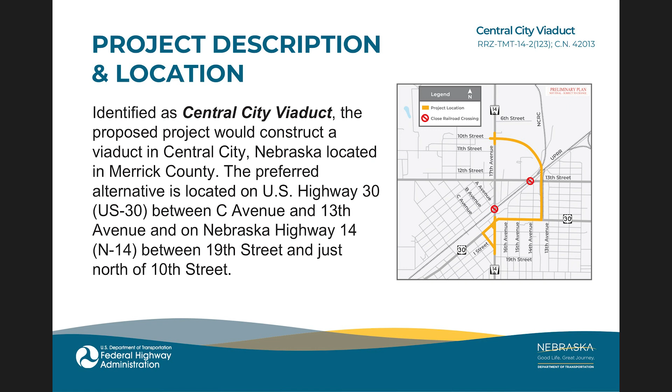Thank you, Commissioner Kindig. Hello, I'm Eric Klein. I'm NDOT's District 4 Construction Engineer. Identified as the Central City Viaduct, the proposed project would construct a viaduct in Central City, Nebraska, located in Merrick County. The preferred alternative is located on US Highway 30 between C Avenue and 13th Avenue, and on Nebraska Highway 14 between 19th Street and just north of 10th Street. The existing US 30 and Highway 14 intersections downtown would be realigned to the west, approximately B Avenue.

US 30 would be reconstructed as a 3-lane curbed urban roadway with 12-foot wide lanes, sidewalks, and parking between C Avenue and B Avenue, and between 16th Avenue and 13th Avenue. Between B Avenue and 16th Avenue, US 30 would be a 2-lane divided curbed urban roadway with a 4-foot wide raised median and 20-foot wide lanes with sidewalks. C Avenue and existing Highway 14 from US 30 to I Street would be designated as one-way pairs for northbound and southbound Highway 14. Highway 14 would be reconstructed as a curbed urban roadway with 12-foot wide lanes, sidewalks, and parking.

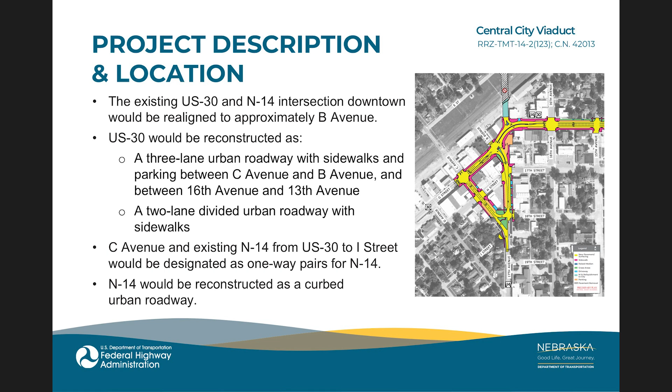A portion of Highway 14 would be constructed on a new alignment starting from US 30 halfway between 14th and 13th Avenues, proceeding north, crossing over the Union Pacific Railroad, and then proceeding west to connect back to existing Highway 14 at 10th Street. These improvements would consist of constructing a 580-foot-long viaduct over the Union Pacific Railroad. The roadway would be a 2-lane curbed urban roadway with 12-foot wide lanes and 6-foot wide shoulders and a sidewalk on the east side of the roadway.

Two existing at-grade Union Pacific Railroad crossings would be closed as part of this project, one at existing Highway 14 and one at 13th Street. The north intersection that ties into the existing Highway 14 would be a roundabout. The south intersection with US 30 would be a T intersection. As per discussions with Central City, existing Highway 14 from the railroad to just south of 10th Street would be repaired and relinquished to the city.

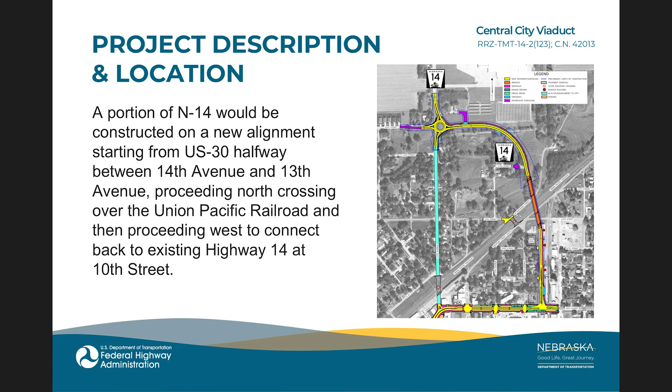The purpose of this project is to eliminate conflicts between trains and vehicles at the existing Highway 14 at-grade Union Pacific Railroad crossing, reduce traffic congestion and associated delays at the Highway 14 crossing of the Union Pacific Railroad tracks and at the intersection of US 30, and to improve operations and reduce crash costs associated with the Highway 14 and US 30 intersection.

NDOT identifies the need for the railroad grade separation structures by considering the potential number of conflicts between road users and trains, traffic delays, and crash costs. The highway rail crossing of Highway 14 and the Union Pacific Railroad mainline meets NDOT's thresholds for considering a grade separation. NDOT has also determined a need to address operational challenges at the intersection of Highway 14 and US 30.

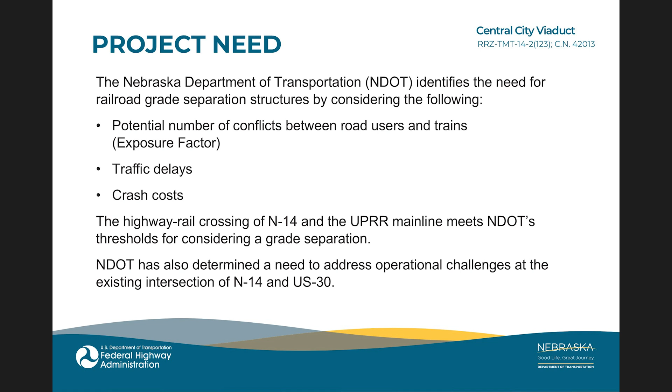In summary, the improvements on this project would reconfigure the downtown intersection of US 30 and Highway 14 to a pair of one-way roadways, reconstruct US 30 from C Avenue to 13th Avenue, construct Highway 14 on a new alignment with a viaduct over the Union Pacific Railroad, close the Union Pacific Railroad crossings at existing Highway 14 and 13th Street, construct a roundabout at the intersection of relocated Highway 14 and 10th Street, and repair the existing Highway 14 between US 30 and 10th Street prior to relinquishment to the city.

Additional improvements would include new paving, culvert and storm sewer work, guardrail, roadway retaining wall, fencing, sidewalks, pavement striping, lighting, pedestrian accommodations, and traffic signals.

Now I would like to talk about the history of this project. In 1996, Central City requested that NDOT perform a study to determine if building a viaduct to carry vehicular and pedestrian traffic over the Union Pacific Railroad mainline tracks would be justified. In 2007, a NEPA review was approved by FHWA for the realignment of Highway 14 along the old Burlington Northern Santa Fe grade bypassing downtown Central City on the east, and the construction of a viaduct over the Union Pacific Railroad tracks. In 2011, the project was reprogrammed more simply as a viaduct project over the Union Pacific Railroad and no longer included the bypass around downtown.

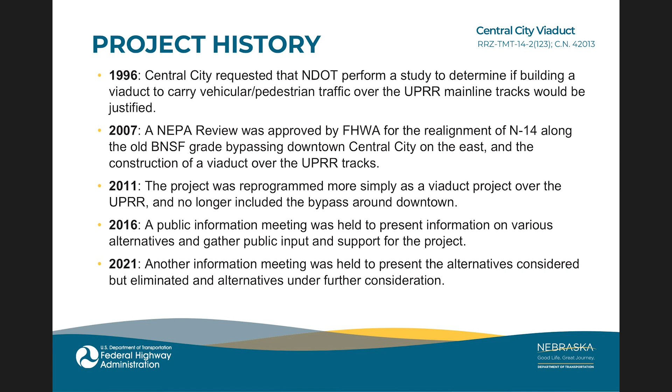Thank you, Eric. Hello, my name is Dawn Knott, and I'm a design engineer and the project manager for the project. Several viaduct alternatives were considered for the project, but were eliminated. The alternative referred to as the on-alignment alternative would have involved reconstructing Highway 14 on its existing alignment and constructing a viaduct over the Union Pacific Railroad. The on-alignment alternative was deemed unfavorable due to its adverse impacts on the central business district, removal of the direct connection of Highway 14 and US 30, increased costs, and impacts to numerous historical buildings. As a result, the on-alignment alternative was removed from further consideration.

The alternative referred to as the East Close alternative would have involved constructing a new roadway along the Nebraska Central Railroad Company rail corridor between 13th Avenue and 14th Avenue, constructing a viaduct over the Union Pacific Railroad, and tying back to existing Highway 14 at 13th Street. The East Close alternative was deemed unfavorable due to steep grades, a required tilting of the roadway on the bridge curve, severed access to 16th Avenue, and impacts to the Central City electrical substation.

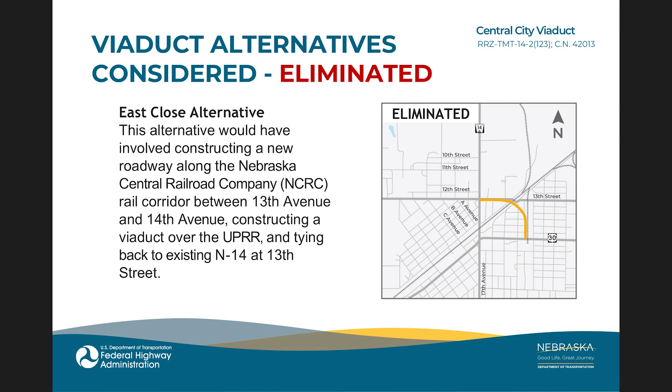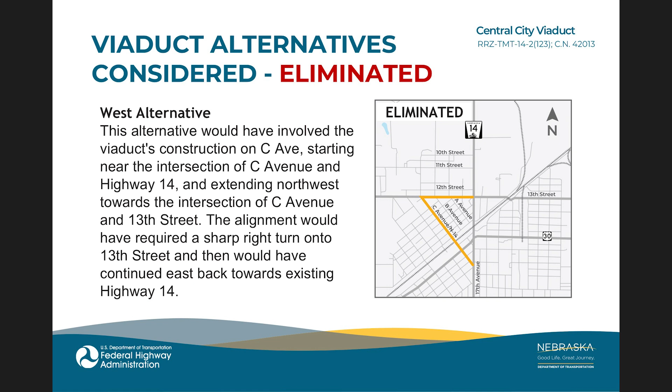The alternative referred to as the West alternative would have involved constructing the viaduct over the Union Pacific Railroad on C Avenue, starting near the intersection of C Avenue and existing Highway 14, and extending northwest towards the intersection of C Avenue and 13th Street. The alignment would have required a sharp right turn onto 13th Street and then would have continued east back towards the existing Highway 14. The West alternative was removed from further consideration due to issues with the existing roadway system, increased impacts on residences and businesses, and disconnection of Highway 14 and US 30. This alternative also received an unfavorable response from the public when presented in 2016.

In addition, several intersection alternatives for the existing US 30 and Highway 14 intersection were considered for the project but were eliminated. 3 roundabout options were considered: a 130-foot diameter roundabout and 2 160-foot diameter roundabouts. Each roundabout had varying degrees of performance, impacts on existing buildings, elimination of parking stalls, and changes to the road network. In addition, the 130-foot diameter roundabout was less favorable for truck movements, and the larger roundabout between B Avenue and C Avenue would have eliminated an entire city block of businesses. For these reasons, all 3 of these roundabout alternatives were eliminated.

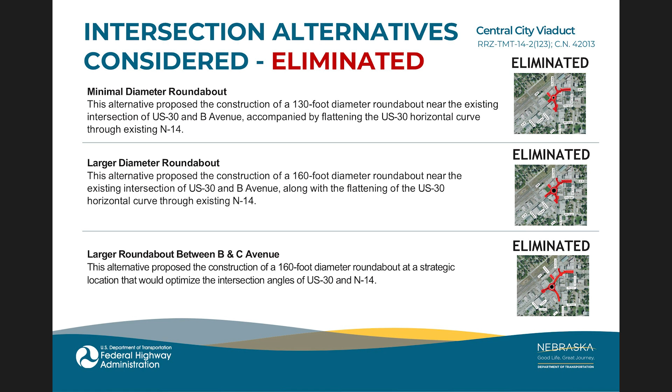2 standard T intersection alternatives were considered that would have relocated Highway 14 to a new alignment, either using B Avenue or C Avenue. Both of these alternatives would have resulted in greater impacts to the downtown businesses, elimination of more parking stalls, and less than desirable turning movements, and both were eliminated.

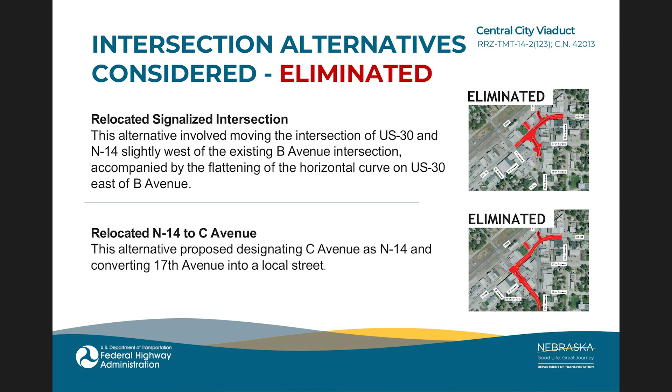The alternative, referred to as the East alternative, and the one-way pairs intersection alternative have emerged as the preferred alternatives for the project, presenting advantages compared to the other alternatives. These alternatives involve the construction of a new roadway along the Nebraska Central Railroad Company rail corridor between 13th Avenue and 14th Avenue, the installation of a viaduct over the Union Pacific Railroad, and a new roadway north of the Union Pacific Railroad that would connect back to existing Highway 14 at 10th Street.

The downtown intersection of Highway 14 and US 30 would be reconstructed as a set of one-way streets. Between US 30 and I Street, Highway 14 would be one-way northbound, while C Avenue would be one-way southbound. This alternative best meets the purpose and need, minimizes impacts to businesses, and maintains regional and local road connections.

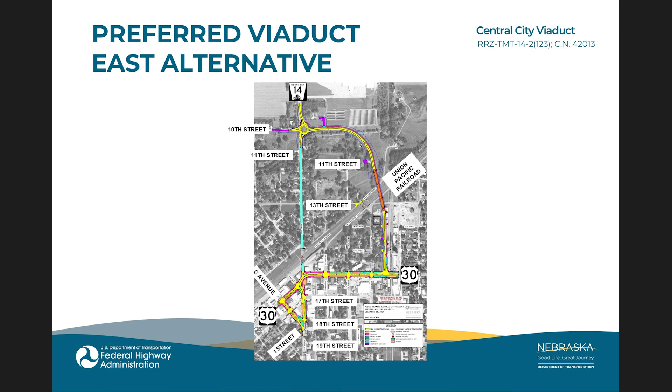Several intersection types were considered for the northern intersection of relocated Highway 14 and 10th Street. That included a standard 4-way stop intersection, a free flow curve, and a roundabout. Ultimately, the roundabout was determined to be the preferred option to address the transportation needs for the project by providing the best operations for all traffic movements and directing highway traffic to the new roadway and viaduct.

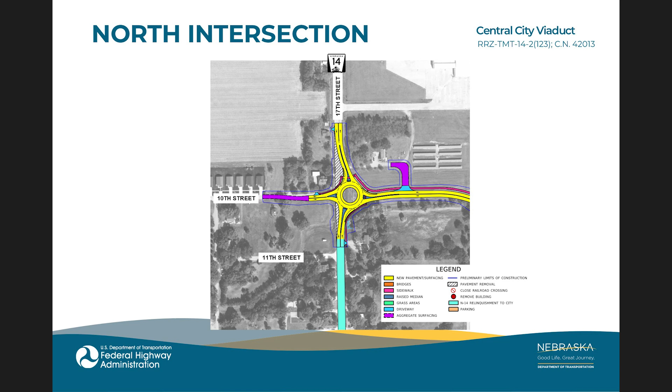The roundabout would be shifted slightly to the east from the existing intersection to avoid impacts to the house on the northwest corner, and would include pedestrian facilities, allowing for future roadway and sidewalk extensions. The house on the northeast corner would be provided with a new driveway access from the new roadway east of the roundabout.

Several intersection types were considered for the southern intersection of relocated Highway 14 and US 30 that included a roundabout and a standard 3-way T intersection. The standard 3-way T intersection was ultimately determined the best option to connect the relocated Highway 14 roadway to US 30 without adverse impacts to the Dark Island Trail, as well as surrounding businesses, including the Fox Theater and the Merrick County Activity Center, and to maintain a more free-flowing condition along US 30.

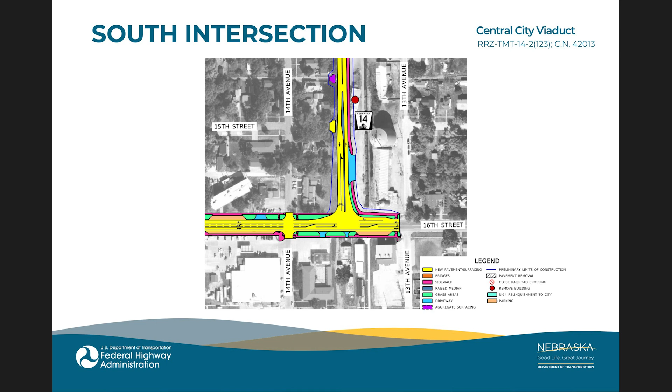The original design for the one-way pairs alternative for Highway 14 and US 30 intersection was chosen because it had the least amount of impacts to the parking and businesses downtown. During the preliminary design, it was determined that the Citizens State Bank building at the southeast corner of the intersection would be impacted. To minimize these impacts, NDOT pursued and received approval for a design relaxation for this segment of US 30 to design for a lower design speed. This allowed the design team to modify the geometrics enough to minimize impacts to the bank.

The result includes 2 wider driving lanes through the horizontal curve, separated by a raised median, and a reduced speed limit of 25 miles per hour. This design refinement will improve safety and operations of the intersection and allow trucks to more efficiently navigate this curve without off-tracking and reducing the potential for crashes.

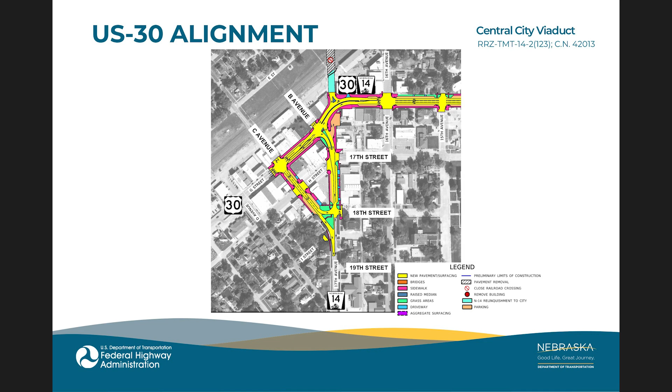Over the years, as the project has been developed, there have been various concepts that have included closing more than just Highway 14 and 13th Street railroad crossings. The other crossings proposed at various times were F Avenue and C Avenue. There was also a potential to construct a separate pedestrian overpass near B Avenue and possibly to restrict pedestrian crossings at existing Highway 14, C Avenue, and D Avenue, all of which currently have dedicated pedestrian crossings.

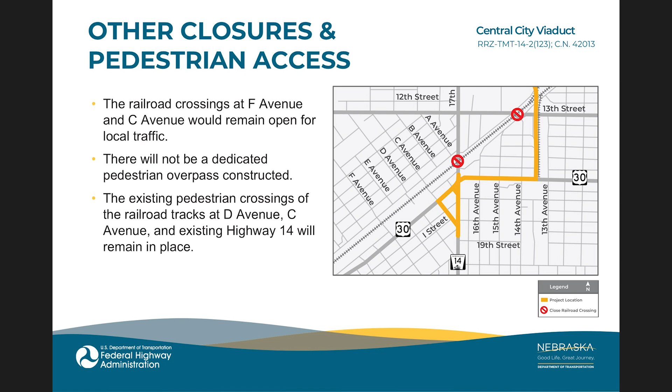Due to changes in the funding arrangements with the Union Pacific Railroad and other design refinements, the additional railroad crossing closures, the pedestrian overpass, and the pedestrian crossing closures are no longer included in the project. In summary, the railroad crossings at F Avenue and C Avenue will remain open for local traffic. There will not be a dedicated pedestrian overpass constructed, and the existing pedestrian crossings of the railroad tracks at D Avenue and C Avenue and existing Highway 14 will remain in place.

It should also be noted that a sidewalk would be constructed on the east side of relocated Highway 14, beginning north of the Dark Island Trail along US 30 over the Union Pacific Railroad tracks and continuing to the roundabout at 10th Street. The sidewalk would be 8 foot wide from the north end of the Dark Island Trail to just north of the viaduct, and then it would be a 6 foot wide sidewalk from there to the roundabout at 10th Street.

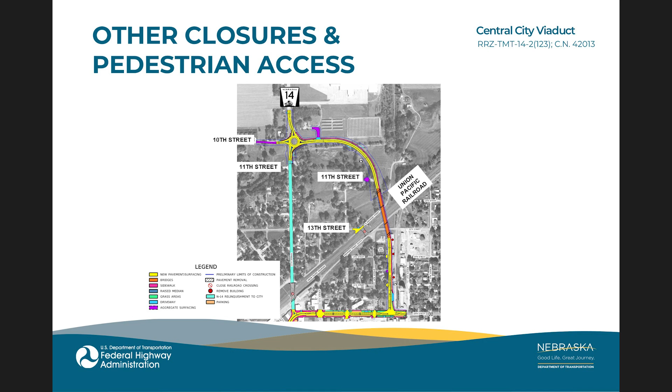Pedestrian access throughout downtown would be enhanced and improved by the installation of curb bump-outs, that's a tough one, and other design features, which would reduce crossing distances and improve pedestrian safety while crossing streets. Furthermore, the existing push-button crosswalk across US 30 at 15th Avenue would remain in place.

As Eric stated earlier, the existing US 30 and Highway 14 intersection downtown would be realigned to the west to approximately B Avenue. The EA describes access to and from B Avenue north of US 30 being closed. However, NDOT recognizes the hardships presented by restricting this access and is now proposing to maintain access to B Avenue north of US 30. This change is represented in the mosaics you see today.

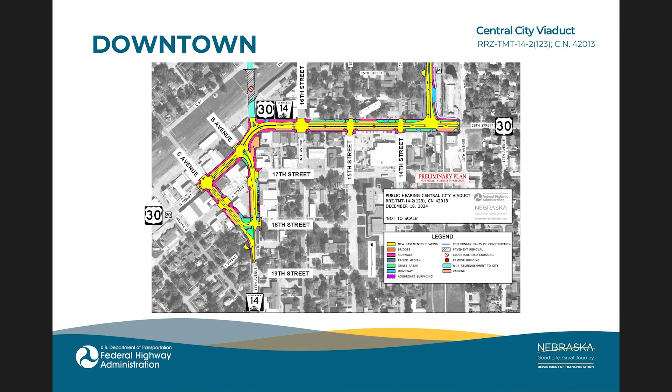This slide shows the typical section of US 30 from B Avenue to 16th Avenue. This section of US 30 would have two 16-foot wide driving lanes, a 4-foot raised median, as well as a 4-foot buffer outside the driving lanes and sidewalk. As mentioned earlier, the purpose of removing the center turn lane and constructing wider driving lanes is to facilitate large trucks maneuvering through the curve downtown.

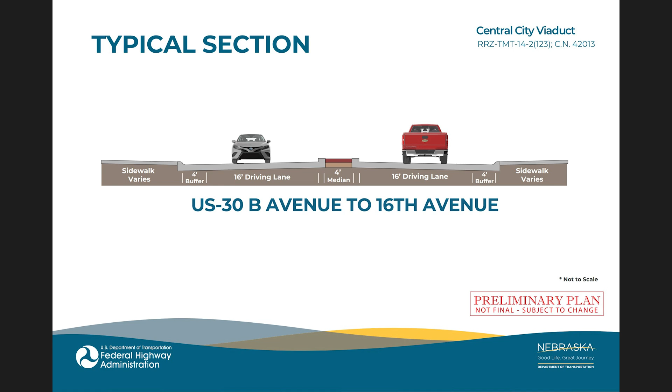This slide shows the typical section of US 30 from 16th Avenue to 13th Avenue. This section of US 30 would have two 12-foot wide driving lanes, a 12-foot wide center turn lane, a 5-foot buffer outside the driving lanes, parking on both sides at various locations, and sidewalk.

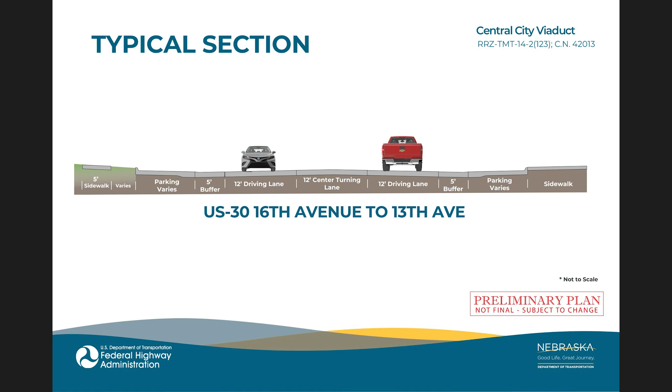This slide shows the typical sections along relocated Highway 14. The top one shows the typical section on the viaduct. The viaduct would have two 12-foot wide driving lanes with 6-foot wide shoulders and include an 8-foot sidewalk with an 8-foot tall fence on the east side. The bottom one shows the typical section of relocated Highway 14 north of the viaduct, which would include two 12-foot wide lanes, 6-foot wide shoulders, and a 6-foot wide sidewalk on one side.

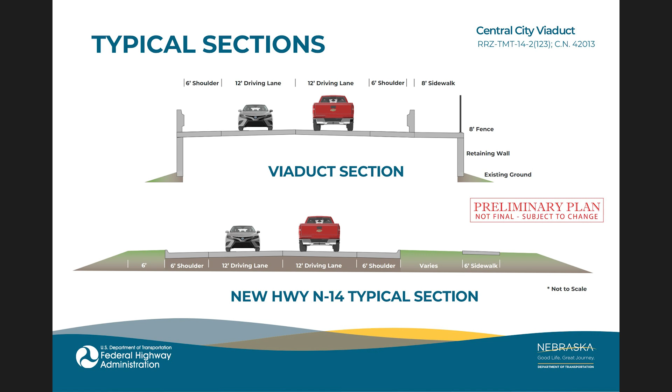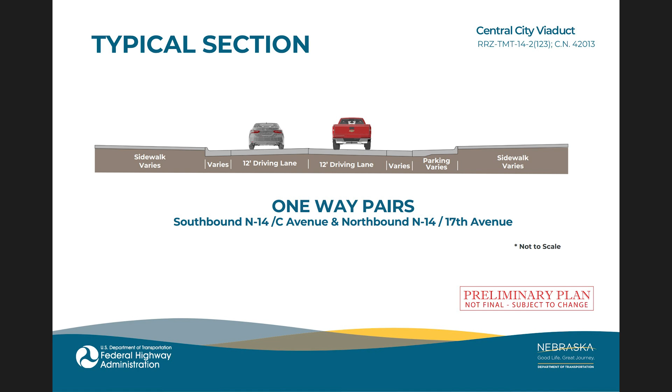This slide shows the typical section of Highway 14 one-way pairs south of US 30. Southbound Highway 14 would be on C Avenue, and northbound Highway 14 would be maintained on existing Highway 14. The one-way pairs would include two 12-foot wide driving lanes, parking, and sidewalk. I'll now hand it over to Jason to talk about the draft environmental assessment and potential impacts.

The preferred alternative would require relocation of several utilities, including power lines, gas lines, telecommunication infrastructure to accommodate project construction. Underground utilities may be relocated or encased under new roadway, and adjustments to transmission lines and poles near the Central City Power substation would be required. NDOT would continue to coordinate with the utility companies during final design to identify specific impacts and relocation needs.

19 historic properties were identified near the project, but these properties would not be affected by the project as proposed. The preferred alternative would require the temporary occupancy of the north end of the Dark Island Trail, where it meets Highway 30. The Dark Island Trail would remain open to public and continue to operate normally. Alternative access would be maintained from the Fox Theater parking lot and the Central Park parking lot.

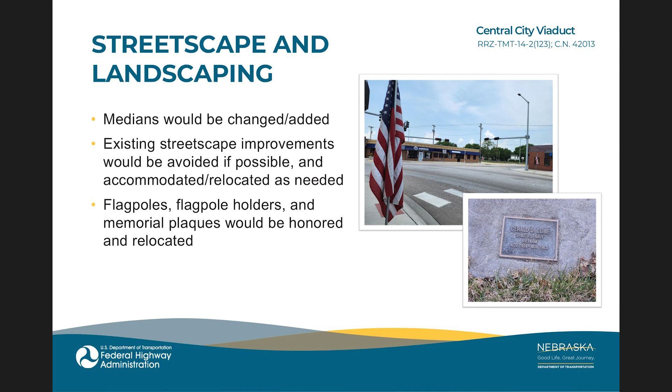We are making thoughtful updates to improve local access and mobility. Crosswalk locations would be evaluated for safety and functionality. This may involve modifications to existing crosswalks or adding new ones if they are warranted. Parades and festivals are an integral part of the community and we will consider them during our final design. Construction schedules may be adjusted to support these events. Additionally, while the existing business and residential driveways would remain, some modifications may be necessary to align with the new roadway configurations. These changes would be implemented with attention to maintaining access and minimizing the inconvenience.

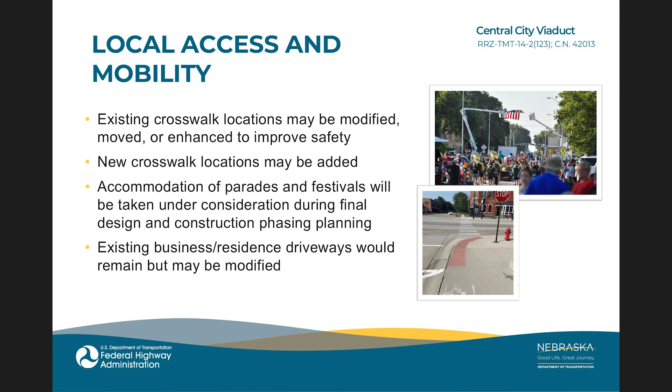The proposed project would be constructed primarily under traffic with lane closures controlled by appropriate traffic control devices and practices. However, designated detours would be provided for through truck traffic on Nebraska Highway 14 and US Highway 30. The detour for Highway 14 would utilize Nebraska Highway 92, US Highway 81, and Nebraska Highway 66. The detours for US 30 would vary depending on the stage of construction and would utilize either Nebraska Highway 92 and US Highway 281, or Nebraska Highway 39, Nebraska Highway 92, US Highway 81, Nebraska Highway 66, Nebraska Highway 14, US Highway 34, and US Highway 281. Highway traffic detours will be further assessed during final design phase. For local traffic patterns, there may be short-term closures of side roads.

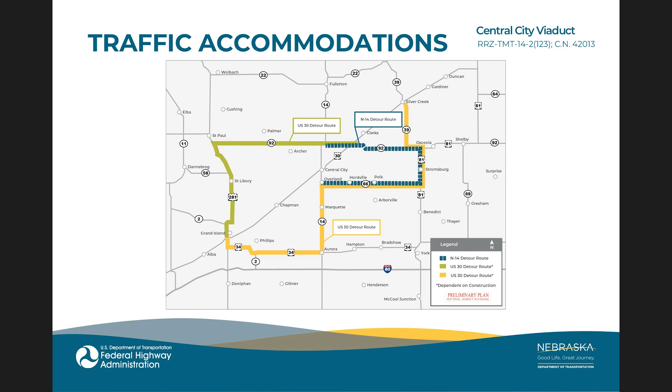Now let's talk about our next steps. Our timeline starts with this public hearing. Many activities need to occur before construction could start, including final design, right-of-way acquisition, and awarding the project to a contractor. Construction is anticipated to begin in 2027 with anticipated completion in 2029. Project costs are estimated at $35 million. Funding would derive from federal, state, local, and railroad funding sources. NDOT would do everything they can to maintain this proposed schedule.

And the final environmental assessment will address the comments we received during the comment period. We will provide a reply to those who raise a question, need further clarification, or specifically request a response. We will consider every comment before moving forward with this project. The final environmental assessment will be posted on the NDOT website once it's completed and will include the comments received throughout the comment period. Staff will be available in the room next door.